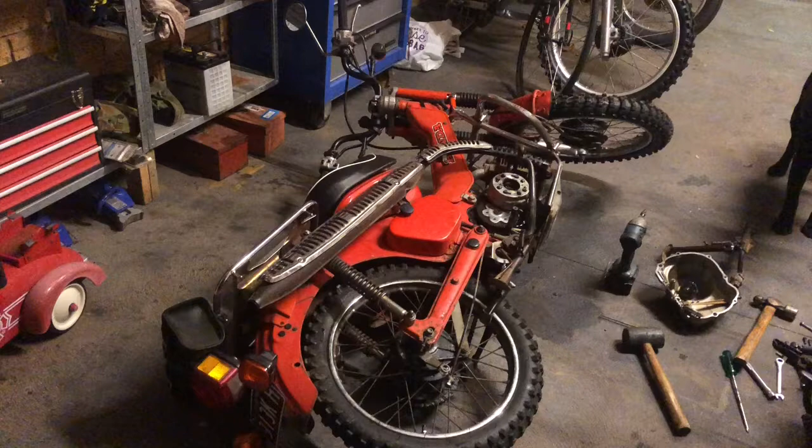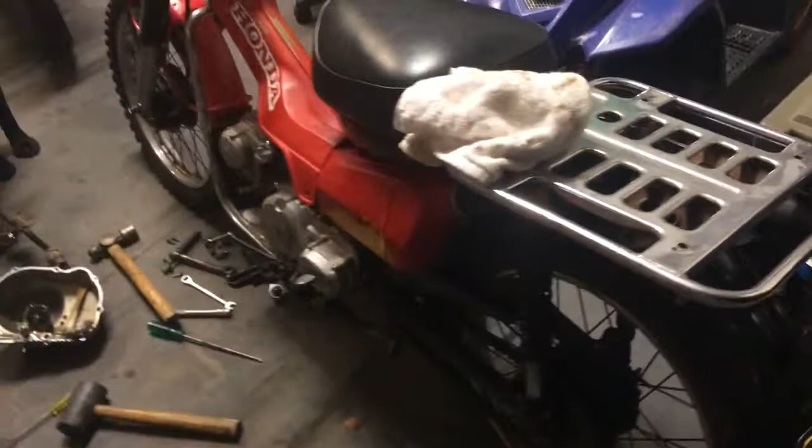What has he done? I hear you say. Well, busy procrastinating, because hacked aggie is pretty much up to the part where I am removing the rest of the black paint, which is a pain in the ass. So instead of doing what I'm supposed to do, I'm looking at my bike, because I vowed not to touch Brittany until this is finished. So I'm not touching Brittany, I'm touching my bike.

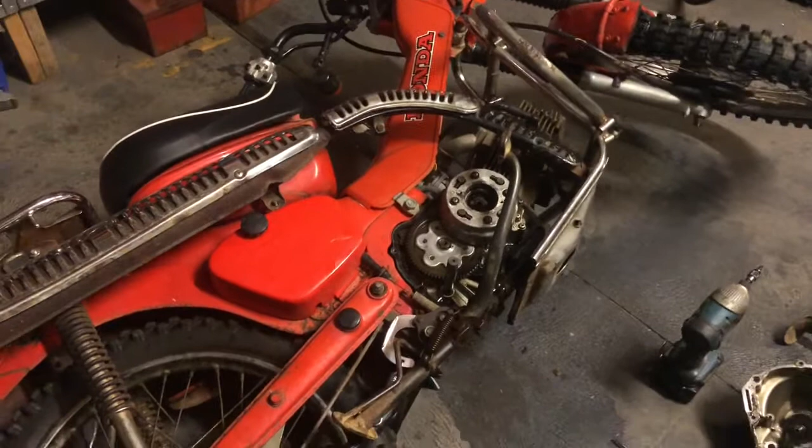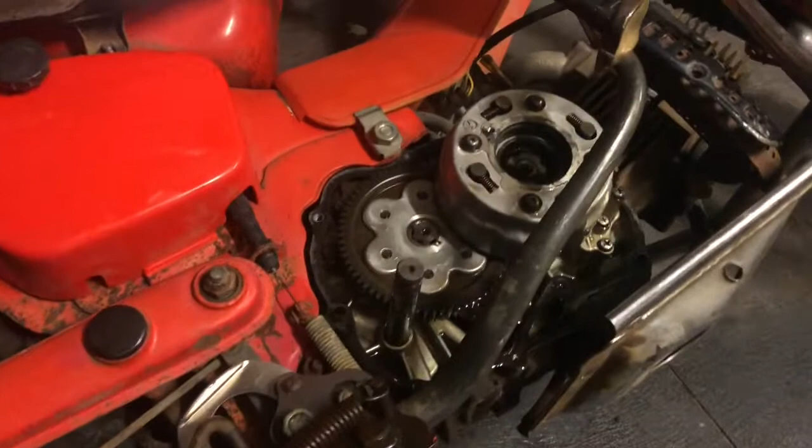So I've always had an issue with the clutch changing gears. When you change gears, it doesn't seem to, whether you say disengage or engage, let's say engage the clutch. It doesn't really seem to engage the clutch, as in make it spin freely so it can go into gear easily. It's almost like a dog clutch where it just jams it into the next gear and you just keep going. There's no give there.

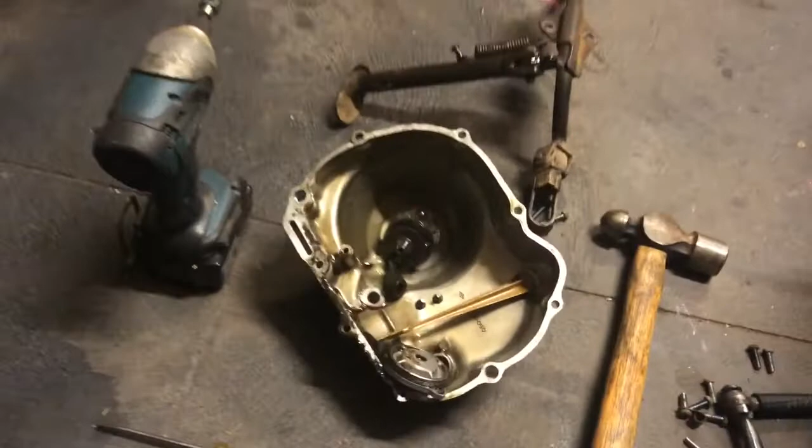And I've tried adjusting the adjusting nut and everything as well, and there still seems to be no give. Now I think I found the issue. I'll just quickly put back what I took off and I'll show you what I mean. Probably should have done this beforehand. These will get the gist of what I'm trying to show you anyway.

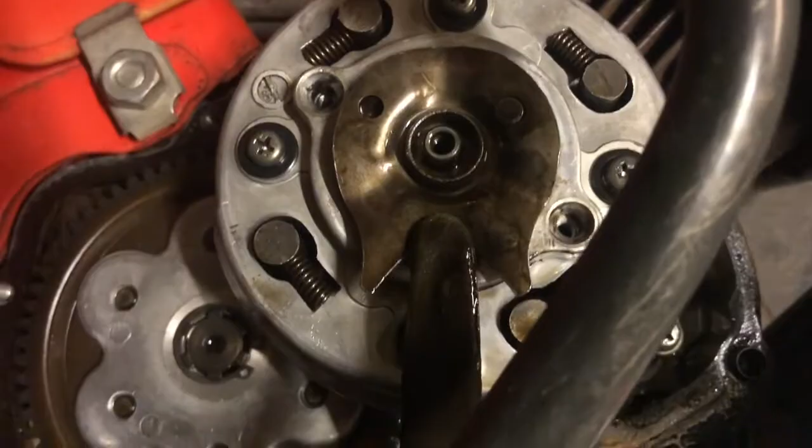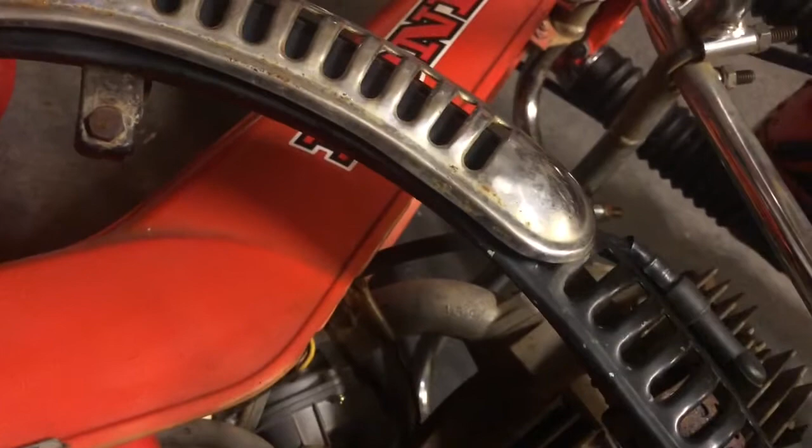Come on. Fucking hell. Oh. Alright, what was that? Oh good, it was a spring. Didn't go any further than that, so we're lucky. Alright, and this was here. Fantastic piece of photography right there.

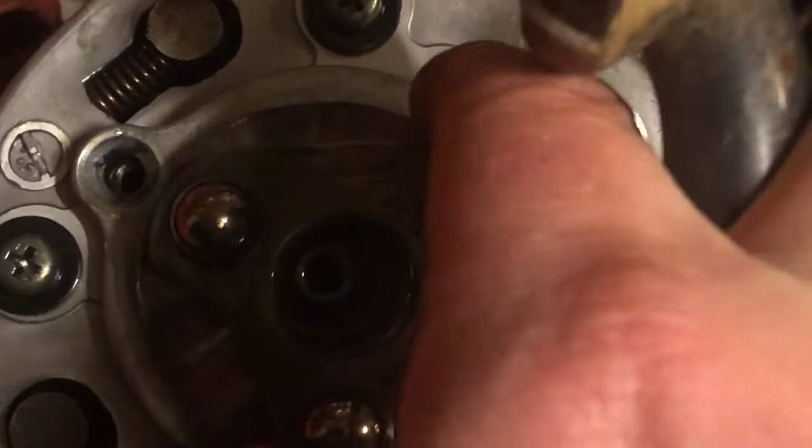Alright, so I pulled off the clutch and this is what it looked like. Now, can anyone see what the issue is? I'll give you a hint. So seeing that bend in it, which way do you reckon it's supposed to go? Probably 90 degrees to the right. So that moves freely there and doesn't bend the shit out of it. That's right.

Right. So with it like that, when you change gears, which I'll do now by changing the gear lever, see how that turns it? Now what this thing here does is push on the inside of the case, this little plate here, which moves the clutch sort of towards me, towards the camera, which disengages the clutch so that you can do the next gear change smoothly and it doesn't dump it into gear.

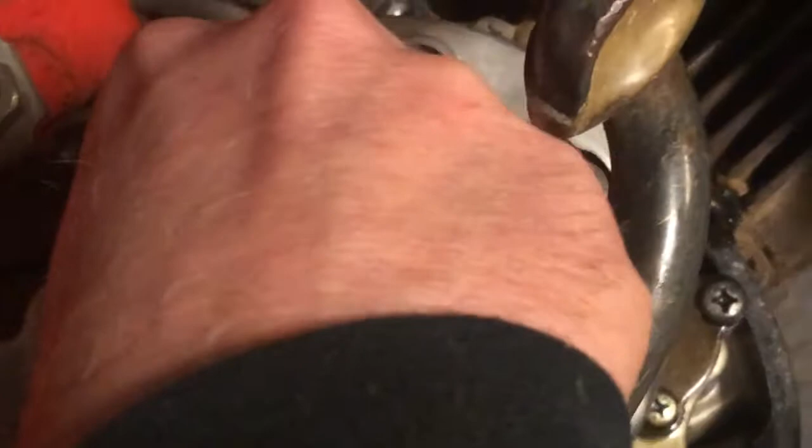Now with that like that there, I'm guessing it was struggling to turn the thing and to lift the clutch away because of the spring tension and because it's not in the correct position. So it would still change gears, but it would just dump it into gear because the clutch wouldn't disengage. And there you go. Well, anyway, so we're doing that. I pulled all that apart.

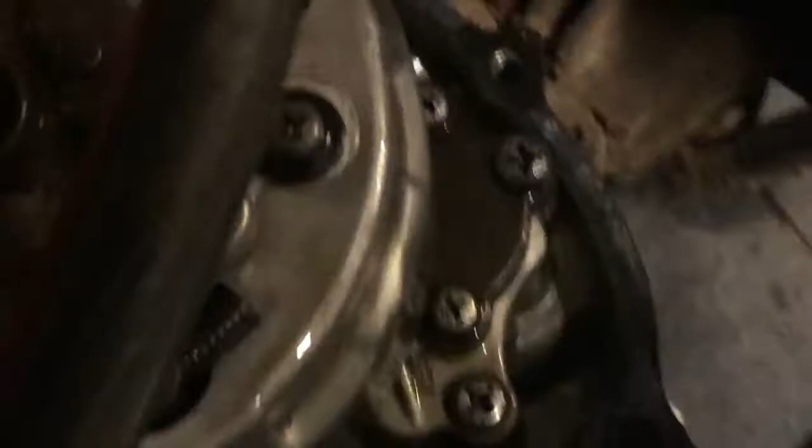Here we've got, if I remove this plate here, there's a seal around there, and the oil pretty much goes in through this hole here, and then spins up around this area here. Now this area here actually acts as a centrifuge and an oil filter for the actual oil. So all the shit that gets caught in the oil actually ends up along the side here.

And it's actually on the maintenance schedule to pull this thing apart and with a rag wipe out all the grit and crap that's all through there. Otherwise it becomes too clogged up and pretty much doesn't do what it's supposed to do. Yeah, it sort of acts as a centrifuge, so it's a clever design by Honda. Much better than a paper filter or a synthetic filter of any type. A centrifuge is much more efficient at getting all the crap out.

It gets thrown along the wall just with the force of the clutch going around and around. Flicks out to the side of the wall and all the shit just stays there, and the actual oil keeps going, making its way down into the crankcase through the hole there. Well, there you go.

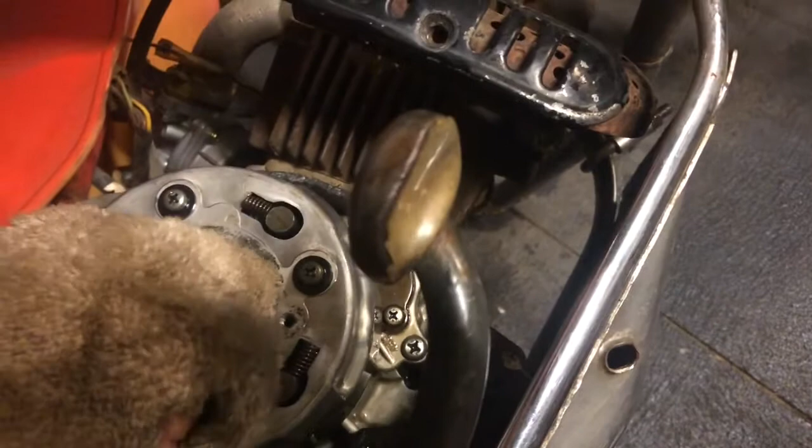Alright, so with my beautiful rag here, I'll clean just the inside of here just to see how much gunk this thing's actually catching. A nice wipe along there. You can see there's a fair bit of gunge and gunk along there. So I'll just keep cleaning all around here, and then I'll, I don't know, see how far I get. I might take the clutch out just to have a look at that detent thing that's behind the main gear there.

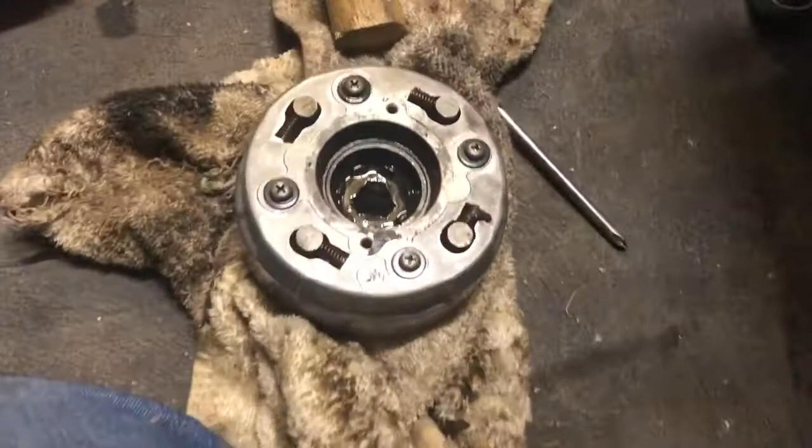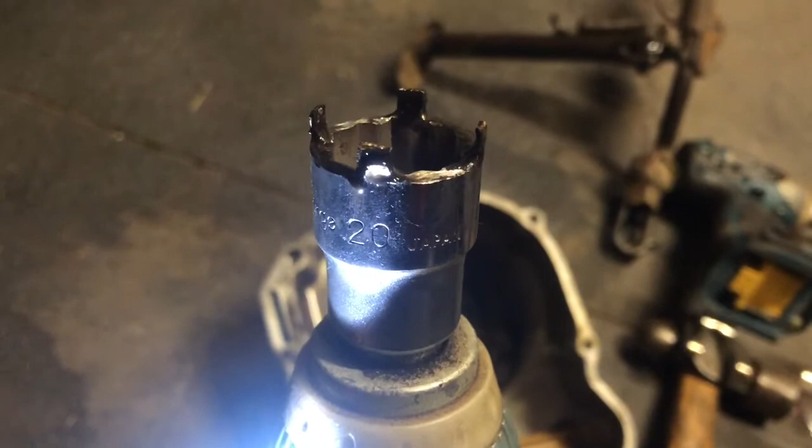Alright, clutch is out now. That was the lock nut. And I had to craft a socket out of a 20mm 1/2 inch socket with a Dremel, a mini cutting disc on the Dremel. I made that. Just saved myself 20 bucks. Yeah.

Cool, so no damage done. So it's good, I can actually see the main crank bearing down there as well. See what condition that's in, because this motor hasn't been opened at all. I haven't opened it since I've had the bike, so it's good to have a look at. So I'll get this main gear off now. I'll just take the circlip off and pull that off and have a look at that detent thing that's behind there. And yeah, make sure that's all good. If that's all good, start reassembling and put it back together.

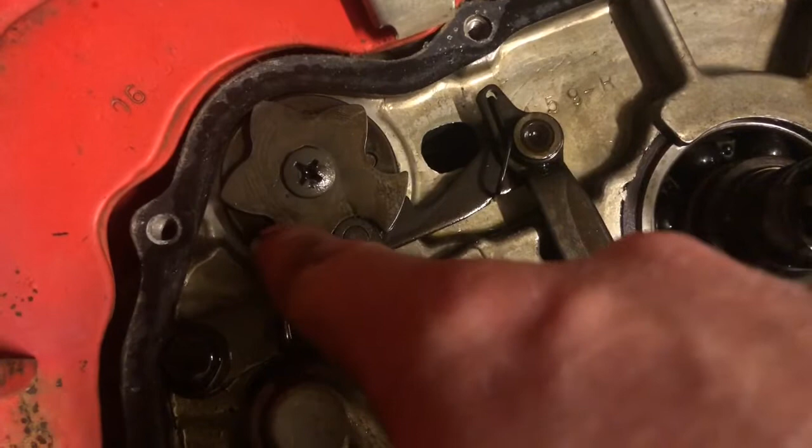Alright, got the main gear off, easy enough. Alright, so what we've got here is the shift drum stopper, this thing here. So each indent is a gear. So 1, 2, 3, 4, and we have neutral as well. So I'm not sure which one's which because I'm not sure what gear it's in. But the problem we have at the moment is, so this arm here, every time it changes gear, should go into the next groove, pretty much.

But have a look what happens when I shift the gears on the gear levers on the other side of the bike, when I'm simulating shifting gears. Yeah. So, it is in fact shifting gears, but it's not doing it properly, and it's not sitting in each gear properly because I haven't touched this. I don't know whether you can see this.

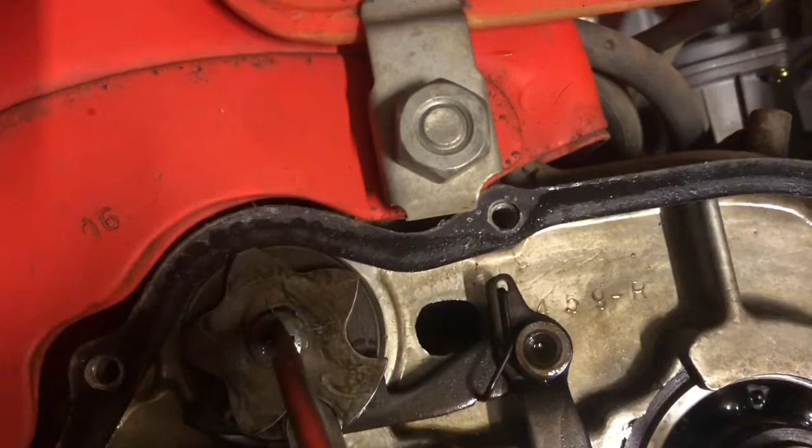Loose as buggery. So, this little arm here, I know it's got a name because this is the thing that breaks off. I think this is the thing that broke off on your bike. So this little jigger here has actually slipped under there because this isn't screwed down properly. And that screw, I can undo that with my finger. See how loose it is. So I'm lucky that thing didn't come out and get chewed up in the engine somewhere on the clutch. Yeah, could have had all sorts of dramas.

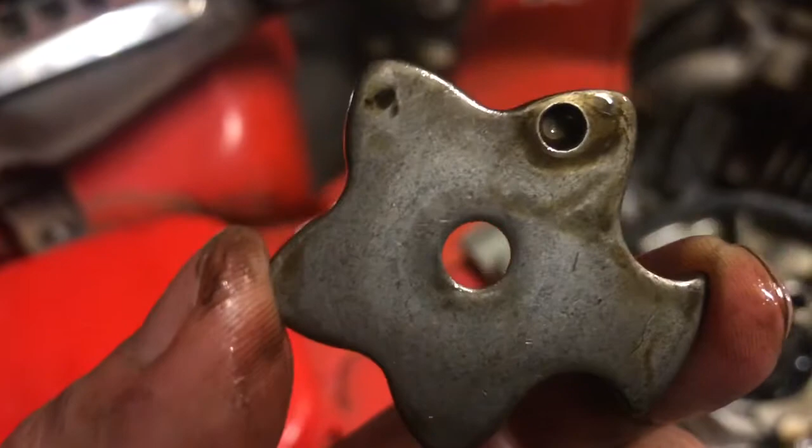So I'll take it off first and just have a look under there, make sure there's nothing else, no other major damage. And if it all looks good, I'll screw it back down and see if we can get it working. Alright, so it was all good. No damage done, although it hasn't been screwed in properly. But you can see there's an indent there where that peg fits. So this peg was just spinning freely whenever it was actually being shifted.

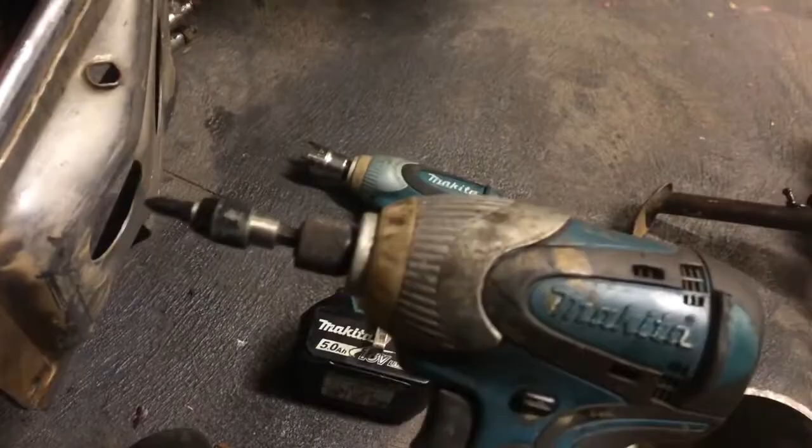So if I simulate it changing gears again, you can see how it turns there. And that's what actually turns the shift drum stopper to lock it in each gear. So I'll line them two up, put it on, tighten it up, let's see if it works. Alright, so we're all screwed down. Everything's going to go up nicely. I will use my good, maybe not that one, my good persuasive friend on this screw to do it up, to make sure the thing doesn't come out again. But I think it was put down properly.

I just don't think old mate, Farmer Joe, that had obviously put some clutch plates on this thing, assembled it properly, and probably didn't locate that peg into the locator hole. So it never lined up properly and it was always sitting proud, hence why the arm for the shift drum stopper kept going underneath and it never sort of locked into gear properly and always had troubles. But yeah, let's have a look.

So it's neutral now. So neutral is the first indent there. So go first gear, second gear, third gear, and fourth gear, which is fine. Hasn't gone all the way in, it's only because the engine isn't rolling over at the same time. You can see if I turn that, it actually moves the gears into place, because the bike has to be actually moving to go into gear properly anyway, so I'm pretty happy with that. So go back the other way.

Third, second, first, and neutral. So we're on.

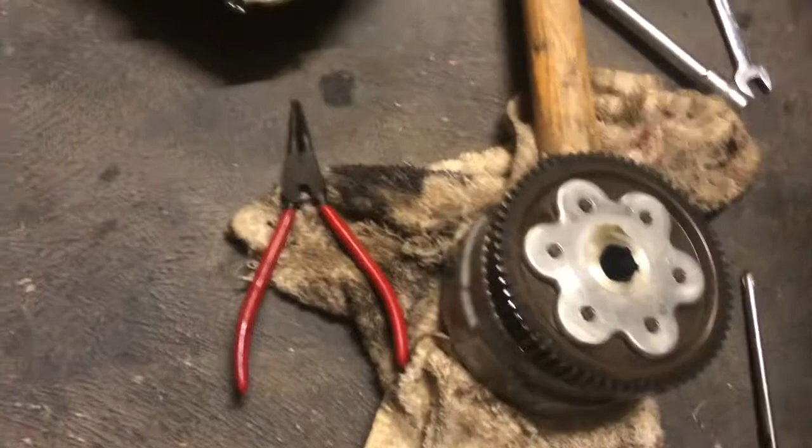That wasn't done properly, and that clutch disengage plate thing on the clutch at the top wasn't done properly either. I'm a bit dubious about how the clutch plates are put in, although I've never had any real issues with it. It's just those 4 screws there to get in there.

Alright, I'll see if I can persuade those screws to come out with the impact driver, and we'll have a look in there at the clutch plates. I do have a spare set of clutch plates anyway, so I might just put fresh ones in and go from there.

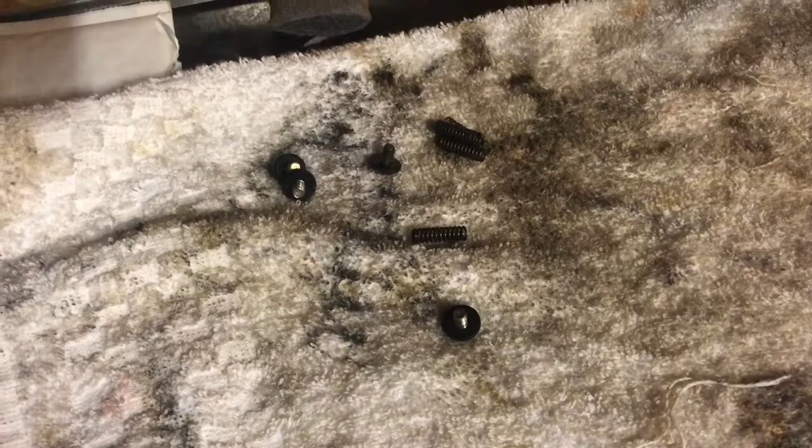Alright, so I managed to get those 4 screws out with the impact driver, no problem, without stripping the heads. I got the springs out of the front as well, so I'll just leave them and let them go flying through the garage, which is great.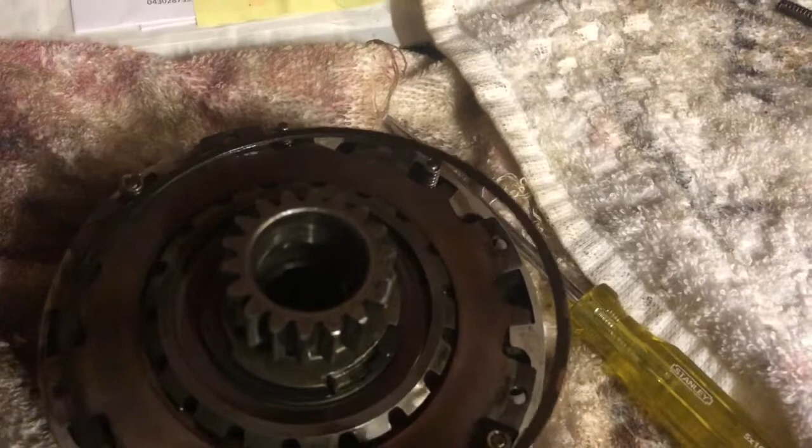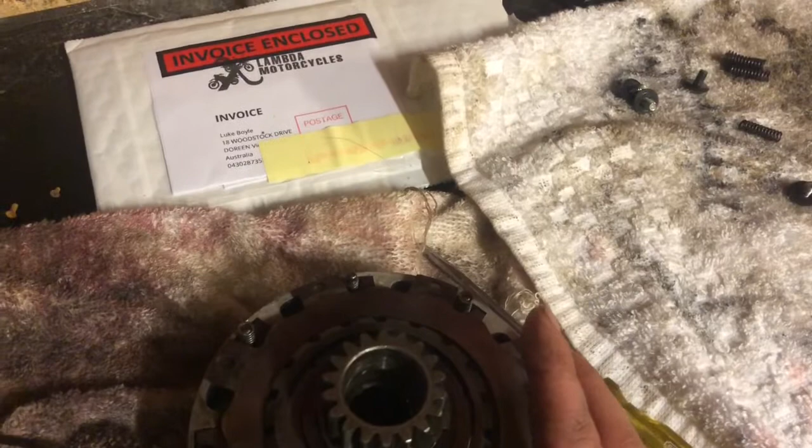So I've taken the retainer clip out and all the plates just sprang out because they're under spring pressure. I'll take these out and film it because I want to make sure I take them out in order, so if I need to, I can refer to the video to put them back in. I don't think I'll have an issue though.

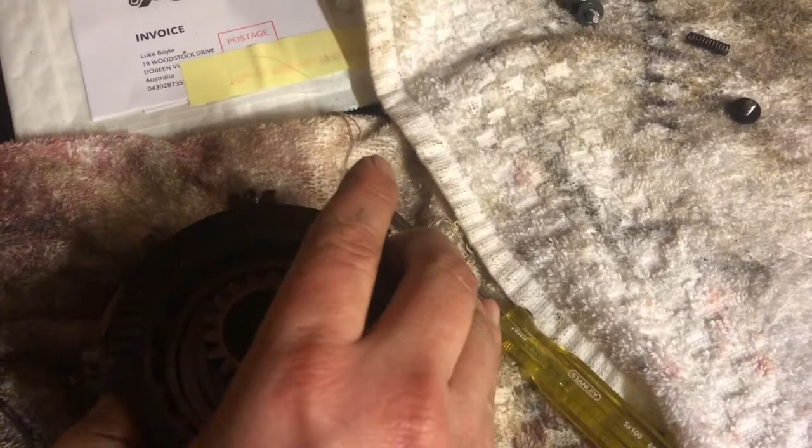It's been hard to do one end though, isn't it? I might come back to this.

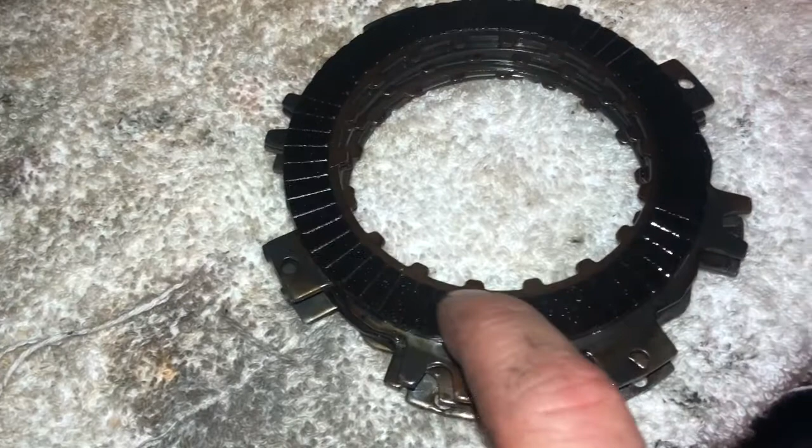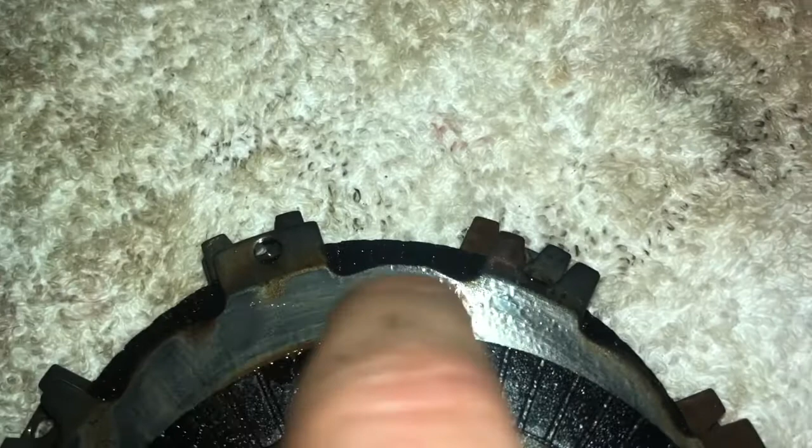Oh, so all the clutch plates are out. They don't look too bad actually. I don't know what a bad one would look like anyway, but there's no burn marks on any of the discs like it's been running hard and wearing out. So I don't actually think they're that old.

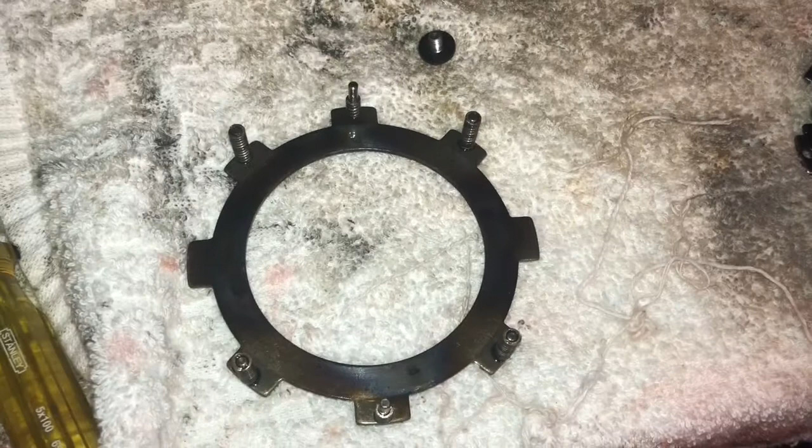Because I got it all out, I may as well put the new ones I got on anyway. So that's the retainer thing that has all the springs on it, that's the first thing that goes back in, and then they all just pretty much go in on top of that.

Start reassembling then, I guess. Before reassembling, I just have to mention this.

Hey Bob, guess what these are called? Bob weights. Yep. So what they do pretty much is at idle, the engine and the clutch isn't spinning fast enough for the clutch to engage. When the engine's revved up, centrifugal force pushes these bob weights out, squishing the clutch plates together, which gets the thing moving. So the more bob weights you've got, the more pressure is applied to the clutch plates.

And I know you can do upgrades with these to put more bob weights in them, so it's a lot stronger clutch on it. It's pretty much like putting a clutch together with stronger springs than that on a car, I guess, like a heavy duty clutch or a button clutch like in the Triple R.

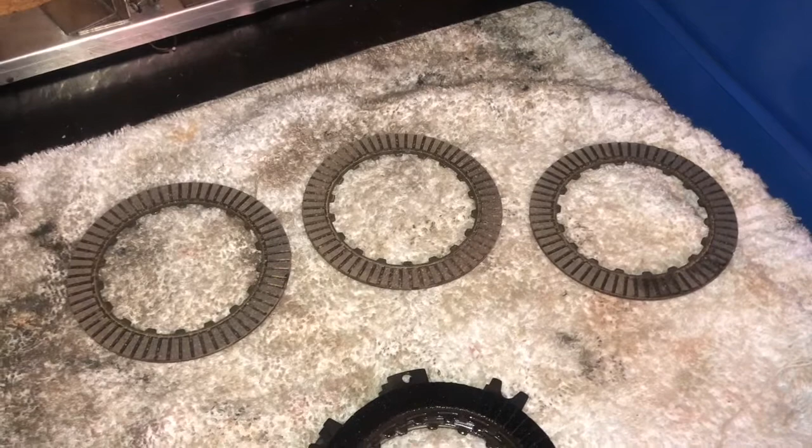Alright, here's my 3 new clutch plates. So what I'm going to do there is add a bit of oil to them, just on the plate, sort of smudge it in, and then reassemble this in reverse order. I'll see whether I can put this phone somewhere where it's not going to fall and film me doing it, or I might not. Let's see.

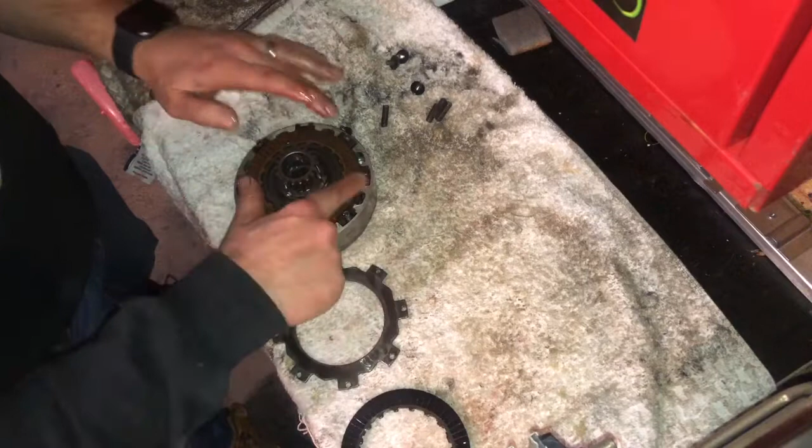Alright, well that's all done. I've double checked the book just to make sure I've done it correctly. I'll give this top plate a bit of a clean, a bit of fluff and shit on it.

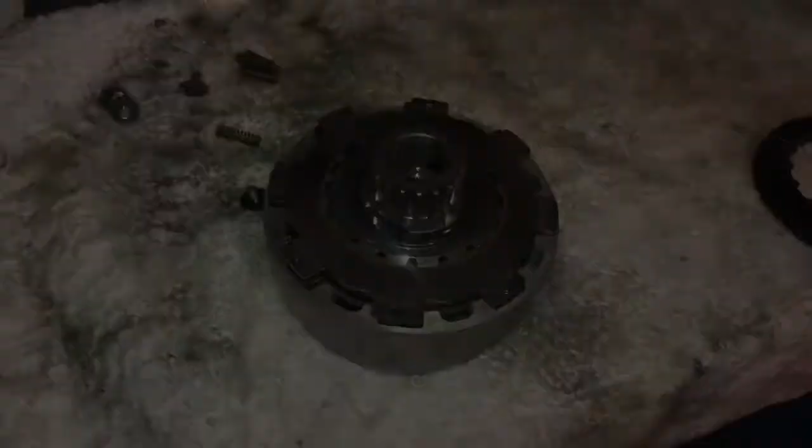Go about trying to put this thing back on, because it's under a fair bit of pressure now. It's going to be good fun doing that. And yeah, if we get that on, see about reassembling it. Alright, well that was a prick.

Just trying to compress the springs back down to put the retainer clip back in. It was a prick, so I had to pretty much find a socket to fit on this end to keep it off the ground, so the thingos could come out of there.

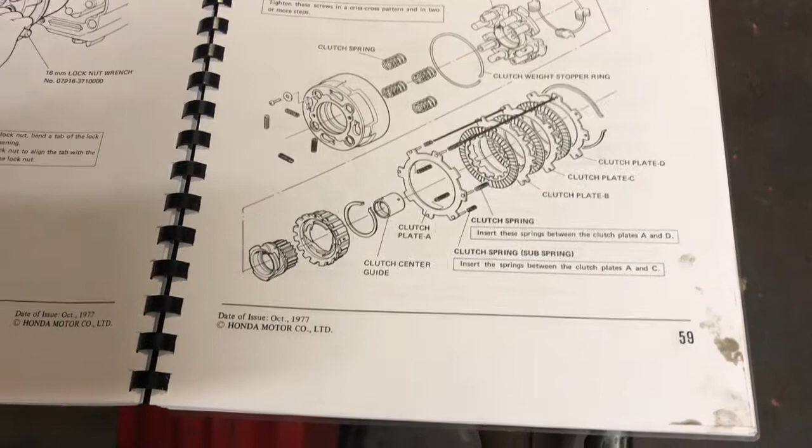Yeah, and kill my knees trying to lean on these to try to put it on, put that retainer clip in, make sure it was seated properly. But after that was all done, it was all good.

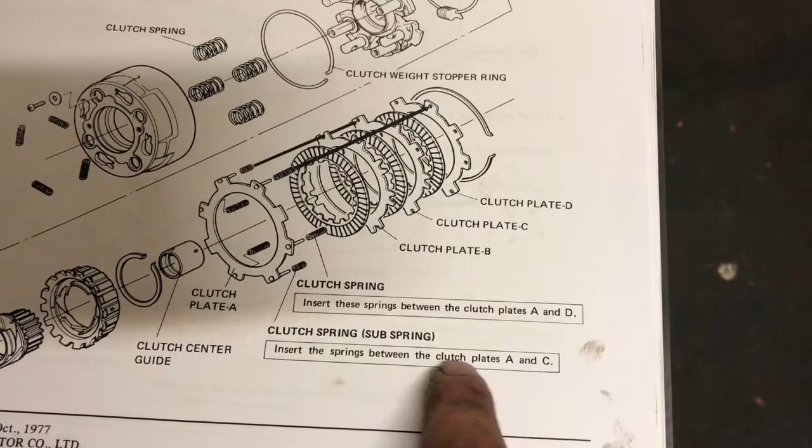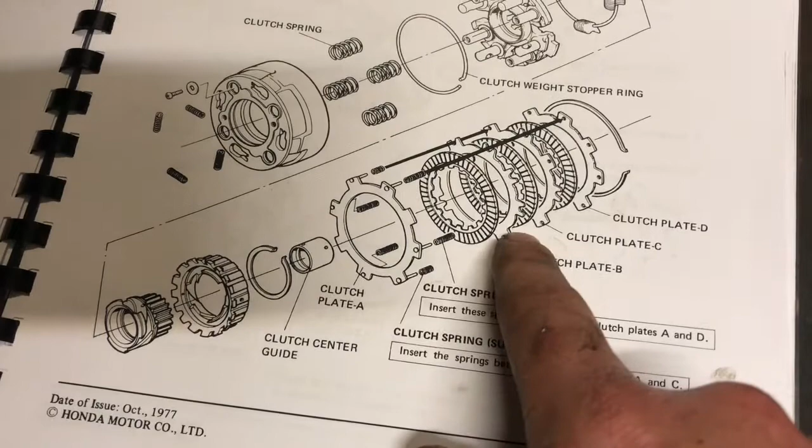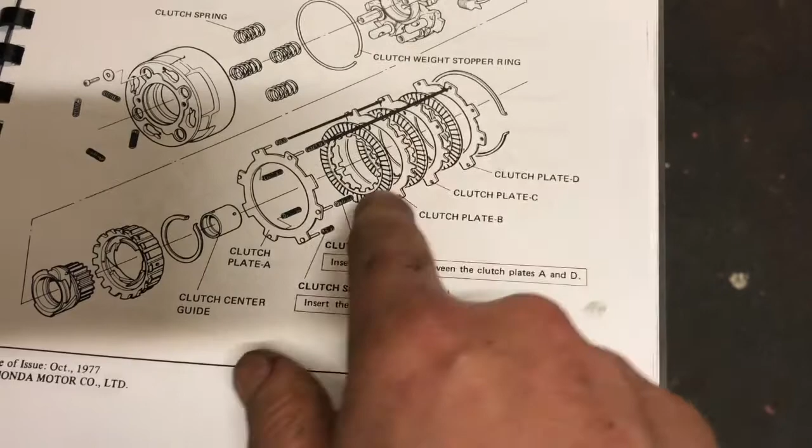One thing I did notice is, if you'll see here, insert the springs between the clutch plates A and C for the sub springs, which just means the shorter springs. These were actually between A and, well, clutch plate C was where clutch plate B is, and clutch plate B was where clutch plate C is. So there was uneven pressure on the clutch plates due to this spring pushing on the wrong one at the wrong time. So there was a bit of uneven wear on the actual clutch fibres or whatever they are themselves, and there were sort of scorch marks on the clutch plates that had a heap of spring pressure on them, and not much obviously on the ones that didn't have hardly any pressure on them because they're in the wrong spot.

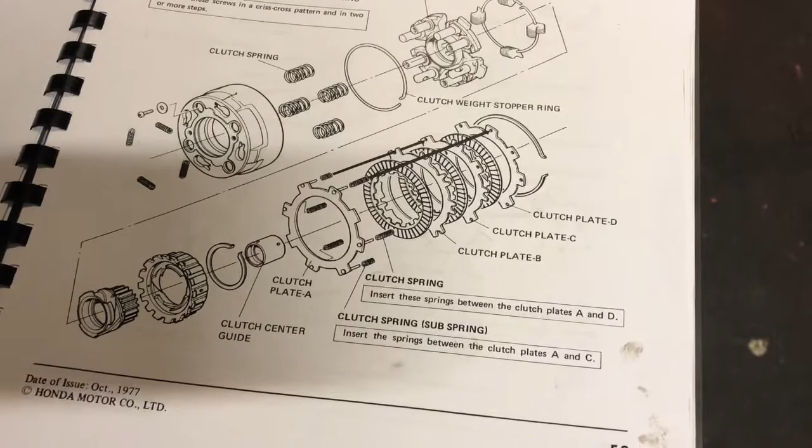So old mate Farmer Joe buggered that up as well, but that's all fixed up now. Didn't manage to get any of this on camera. He's probably sick of it anyway.

Battery went flat, so I put the main drive gear back on, circlip on, slip the clutch on, put the lock nut on with my special homemade tool, and then the washer that's underneath - there's these little pins, so you can pretty much just fold one into one of these recesses, so when the engine's spinning the nut's not going to come off because it's locked in there by that washer. Just one tab, I'm told, will do the job.

Alright, as you can hear there's probably a party going on in the background, I don't know whether you can hear that. Couple of tough guys having a fight.

Anyway, so I'm going to continue putting this back together, and I might even go for a night ride.

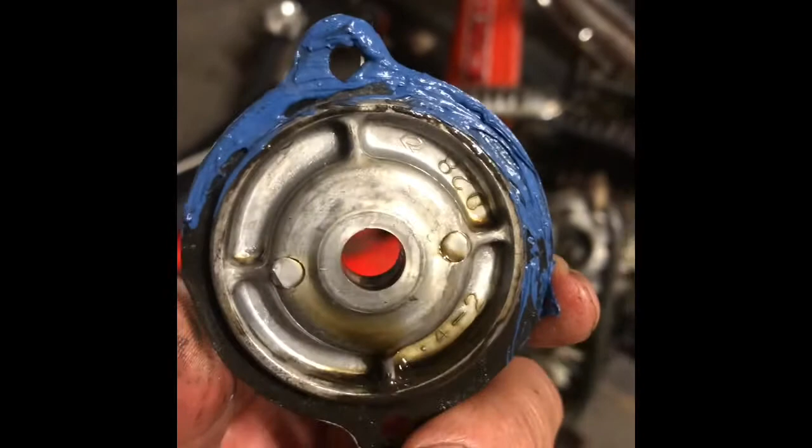Had to make a little bit of a gasket where the centrifuge cover is, whatever it's called - that's what I'm going to call it, centrifuge cover. Yeah, because some of the gasket ended up on there. I'm just going to leave that on there, I'm going to be lazy. Because I've gooped that, I'll stick it on there and put it down. It doesn't matter if it really leaks because it's going to just leak into the engine anyway.

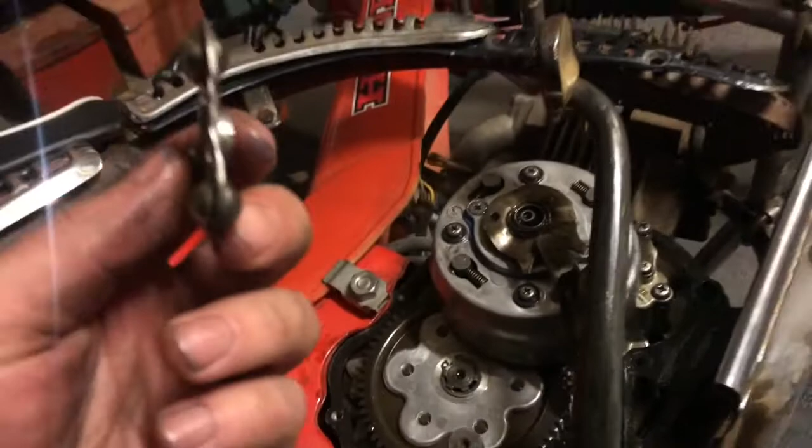Alright, done that. Started putting the shifter thing for the clutch back on. I knocked that - God, it's terrible, isn't it? I knocked that dint out of it. It's still reasonably straight, so I'll reuse this. If I have any issues, I'll just order a new one of these.

The spring's on it as well now, so I'll put that on. Yeah, we'll go from there. Alright, still buttoned up.

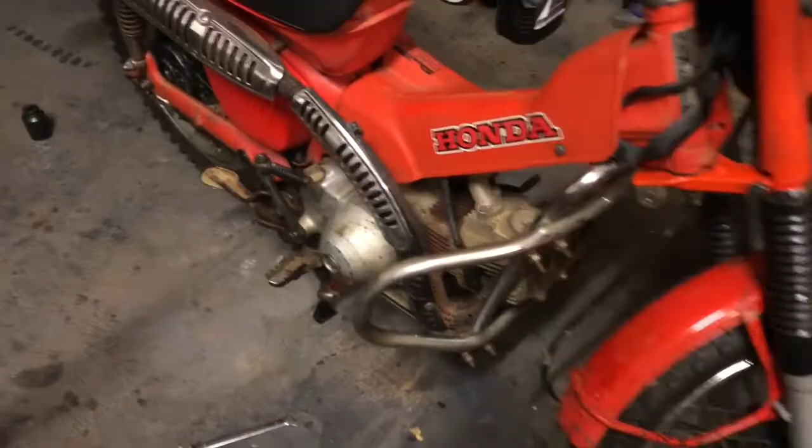Oh yeah, trip meter's going now. Oh, like a Singer sewing machine.

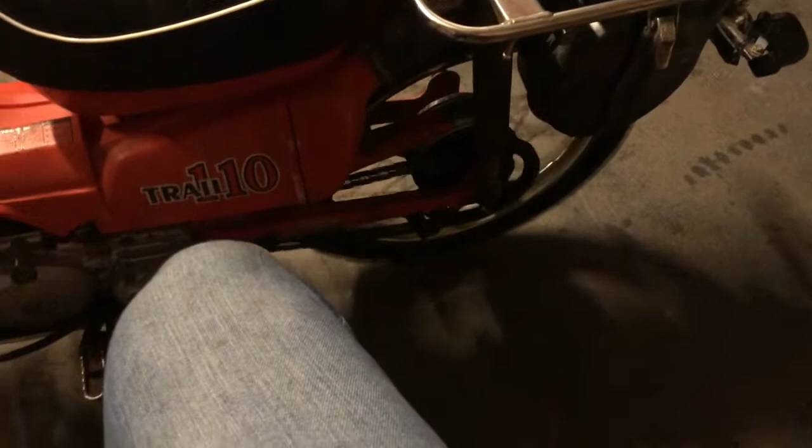Neutral. First gear. Second gear. Third gear. Fourth gear. Neutral.

I'll take it out for a sneaky ride.

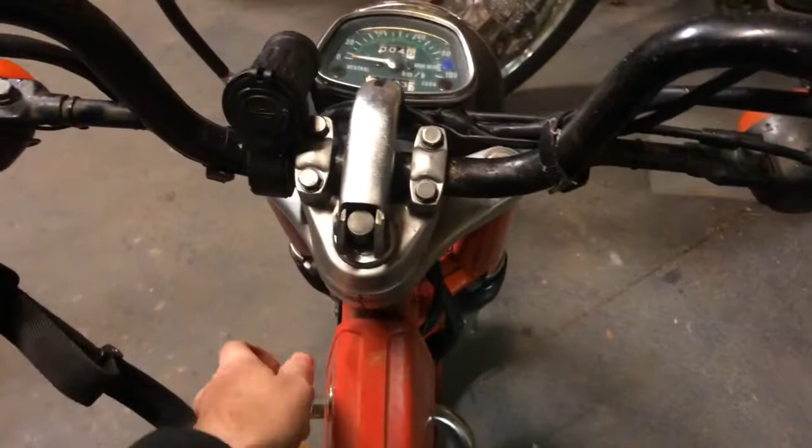Alright, so one lap with the camera on and another bigger lap with the camera off because I thought I was going to crash riding one-handed in the dark with just a hoodie and some jeans on, and it was raining.

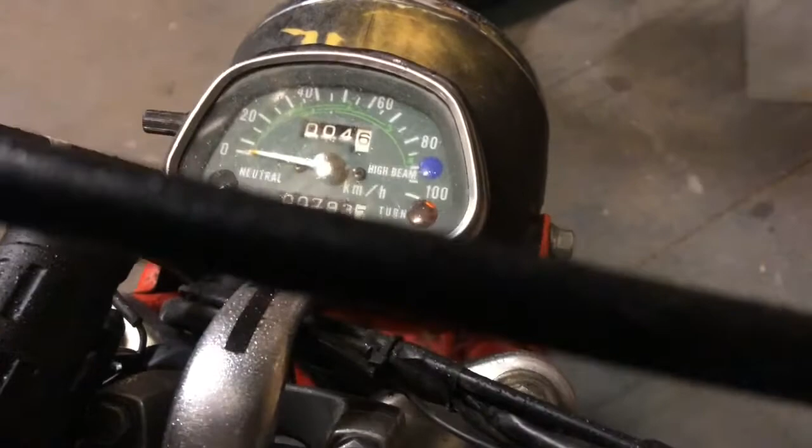So let's do 4.6 Ks on the new trip meter. Look at that, snazzy.

The new adjustable head stem steering didn't come undone. I didn't crash, which was good. Yeah, pretty good.

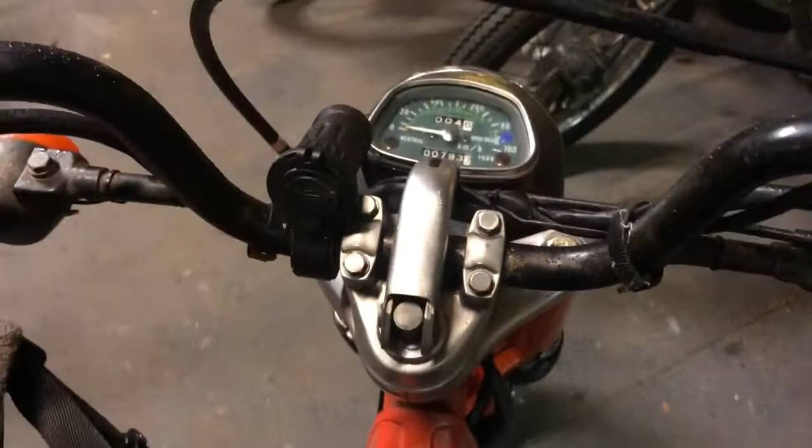Actually quite happy. It actually shifts nicely between the gears now, which is, yeah, funny enough when you put something together right.

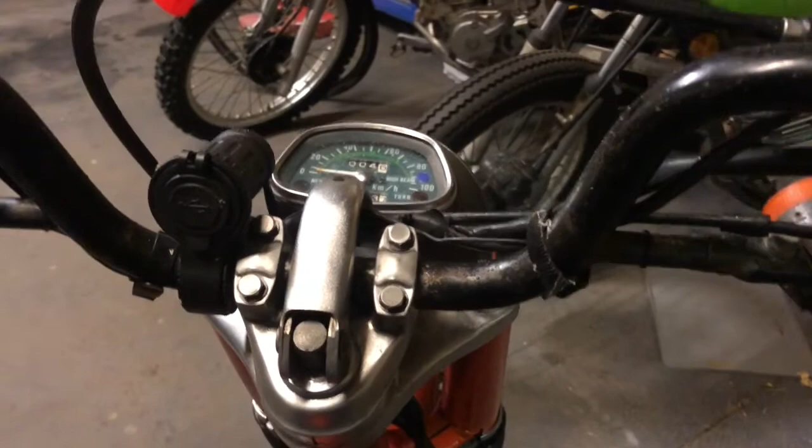The only scary thing is that a couple of those big rides that we've done, both at Talbotville and at Ed's Block, and then the solo run to Delegate with a clutch like that. Yeah, it could have gone a lot worse and blown up on me or something fallen out, or who knows what would have happened, but it didn't.

You know why? Because it's a Honda. Monty's happy as well. Alright, good. Well, that's it for tonight. Ta-da.